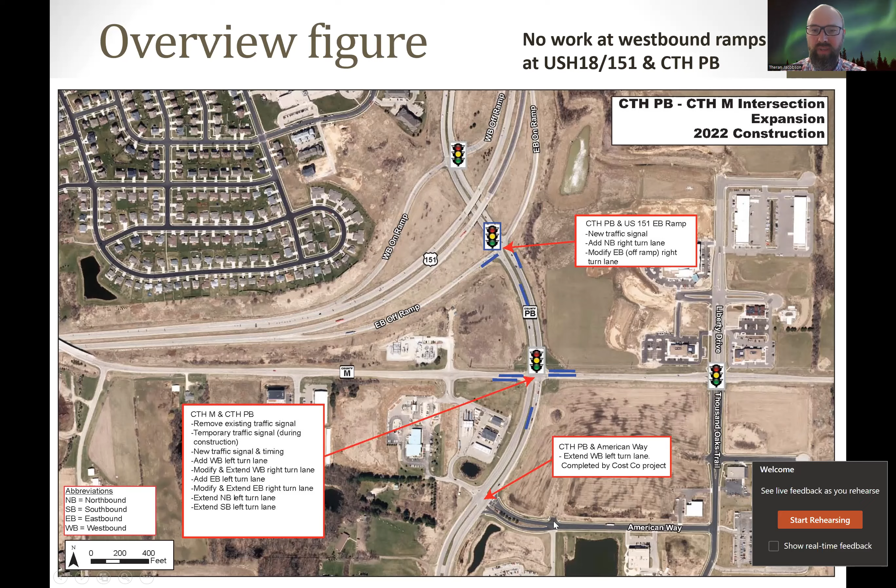The construction schedule: all work is going to be completed in 2022. The project is going to start April 18th, and the first set of work is going to be the eastbound off-ramp of 18151 to PB.

Then May and June there will be work on PB and M for the eastbound leg, and for eastbound movement on the east side of PB. Then June and July will be core work on M, for westbound and eastbound.

Please note, one of the major traffic closures that will occur is the west leg of County Highway M will be closed for a duration of time.

July and August, County Highway PB, that'll be when the work in the left turn lanes is being extended. Then end of August, basically the project will be done minus restoration and minor punch list items, and everything will be opened up to traffic.

As always, construction schedules are subject to change based on weather and then material delays that are occurring throughout the entire industry in all construction projects, but we're not anticipating any, though subject to change if need be.

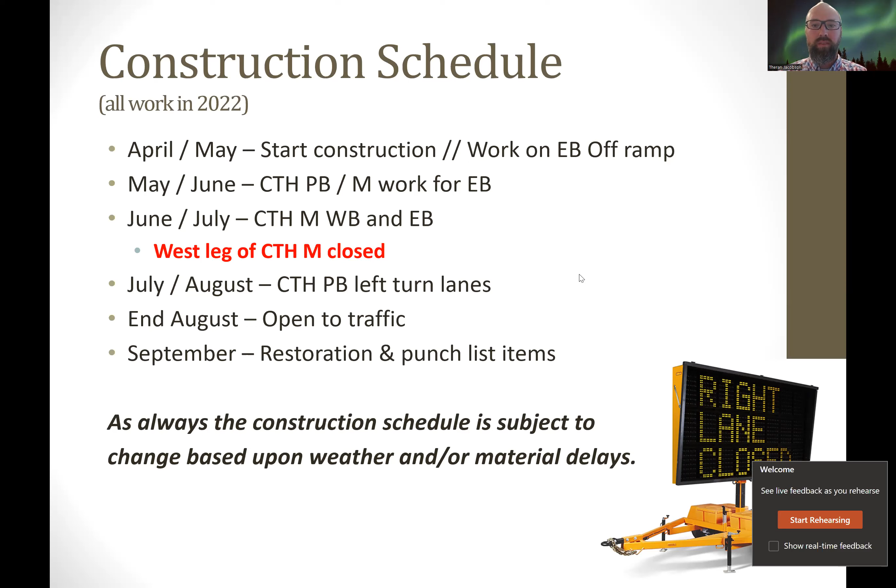Stage 1 work is occurring at the off ramp. The biggest traffic impact there is the eastbound off ramp will be closed. The detour is to Williamsburg Way, up in Fitchburg. The reason is a US highway needs to be detoured to another US highway for traffic loadings and geometric reasons, so truck traffic can still make the movements they need to. I can't detour a US highway to a local road, but we understand local traffic will craft their own way and use some local streets through Verona.

That's anticipated and known, but we have to post the detour from a US highway to a US highway. Stage 2's impact is that the right turn lane from northbound PB to eastbound County Highway M will be closed. We're detouring that road a short way onto American Way, to Thousand Oaks, and then back to County Highway M at the traffic signal at Thousand Oaks. American Way and Thousand Oaks are wide enough and built large enough in the business park to accommodate the traffic that County Highway PB and M see.

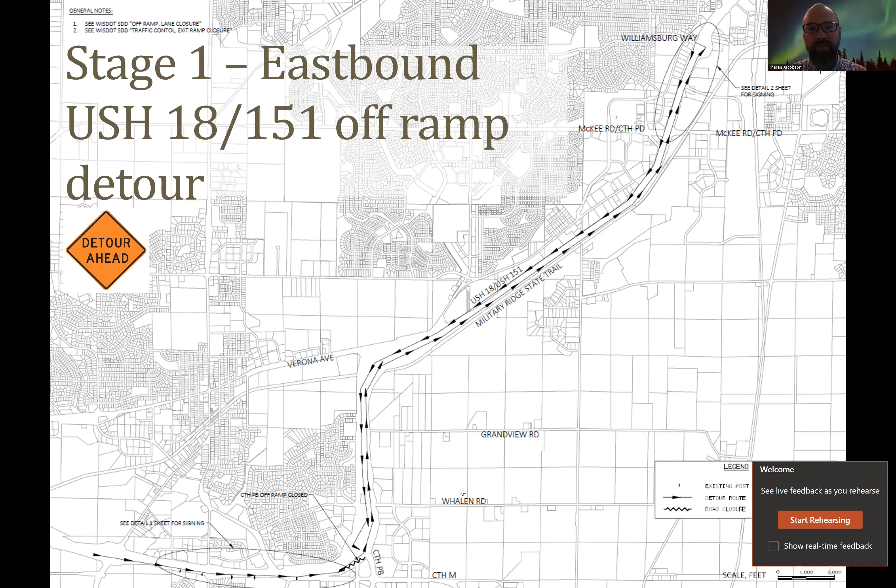This is an overview of the detour for the off-ramp of 18151. I understand there's not a lot of detail here and a lot of lines, but basically the bypass is down in the southern part of the page for eastbound traffic. Continue on 18151 up to Williamsburg Way, do a U-turn, and come back down to the westbound off-ramp for County Highway PB. We understand this is ultimately a truck detour—there are trucks that utilize this area for Kwik Trip, Alliant, and other businesses within the business park and tech park. This will be posted. The message board is up on the off-ramp currently, so please watch out for those. The detour signs will be removed once the off-ramp is opened up, and then the signal at that ramp will be operational.

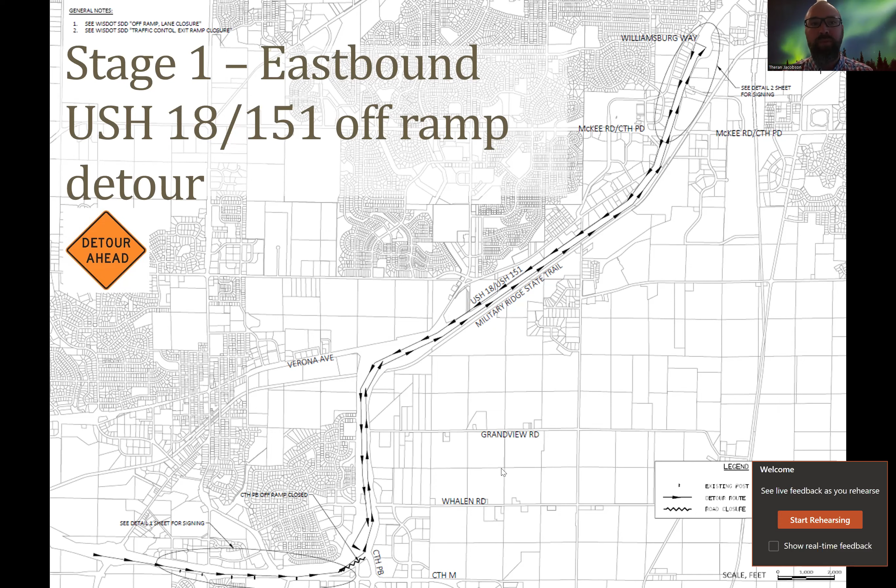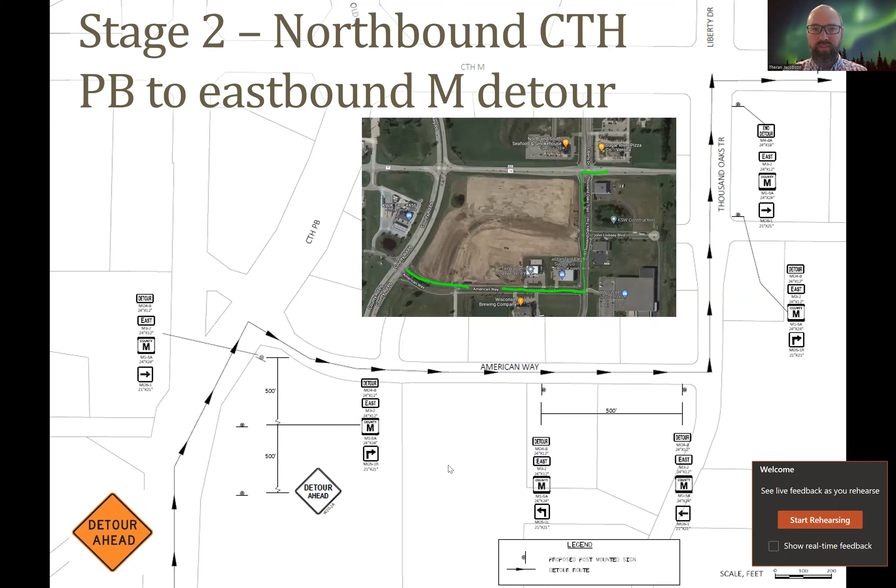There is also a supplemental figure that we provided to Kwik Trip, Alliant, and such, for them to post up to their drivers and at the doors to their business, since they have the rights to do so.

Basically, there will be access to these businesses throughout the construction project. The access off of M will be closed, but the access that ties into American Way will be fully open during construction at all times.

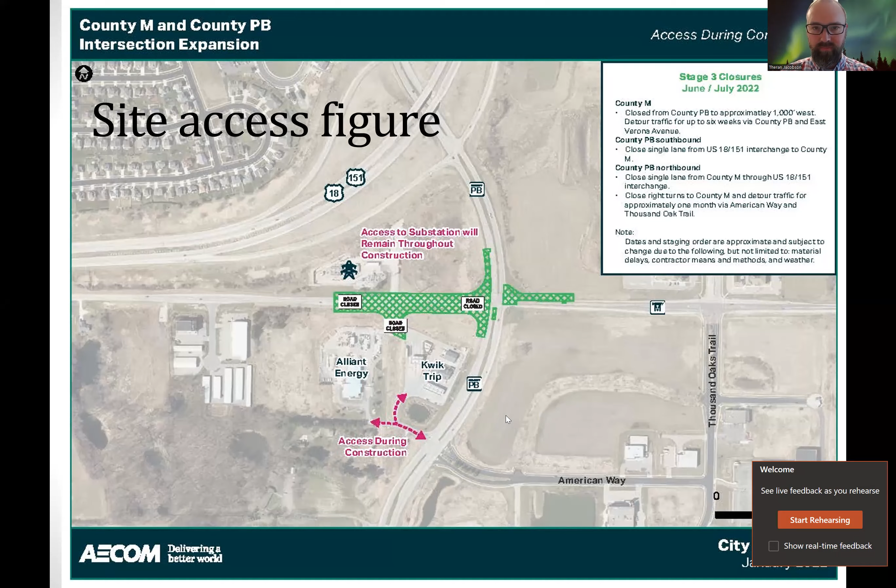The communication, we'll use the website for any updated information. I don't anticipate any that's going to be needed throughout the project. If there are any questions, you can feel free to coordinate with myself, Theron Jacobson, or Eric Scholes.

I can take any questions at this point. The presentation doesn't have a lot of detail in it. The main questions are always traffic, road closures, the duration of the project, and such forth. So I can take any questions, whether anyone raises their hand or puts a question in the Q&A. I see there's a couple in there already. Thanks, Mike, for saying nice job. Are there any questions at this time?